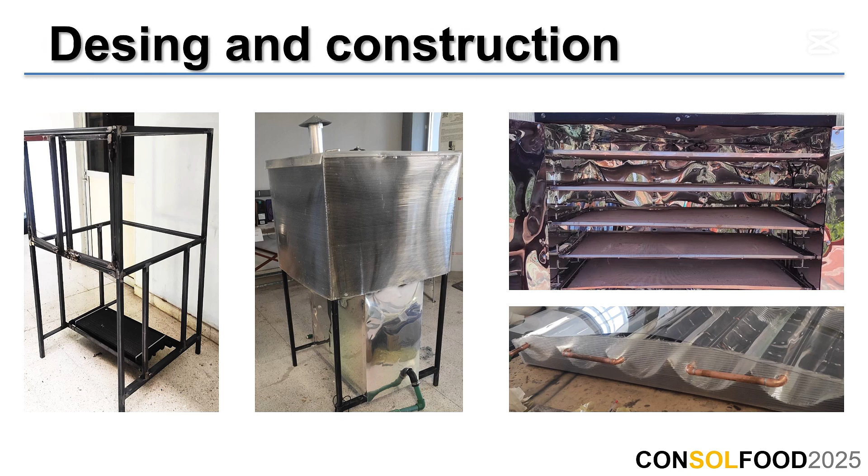The mirrors are oriented west to east and facing south, with a concentration factor of 3 suns. At the focal point of the concentrators, copper pipes were placed, covered with fins made of an absorbent material that helps capture and transfer solar energy to the heat transfer fluid.

Here you can see a real image of the prototype, and in this video a 3D design made with SketchUp.

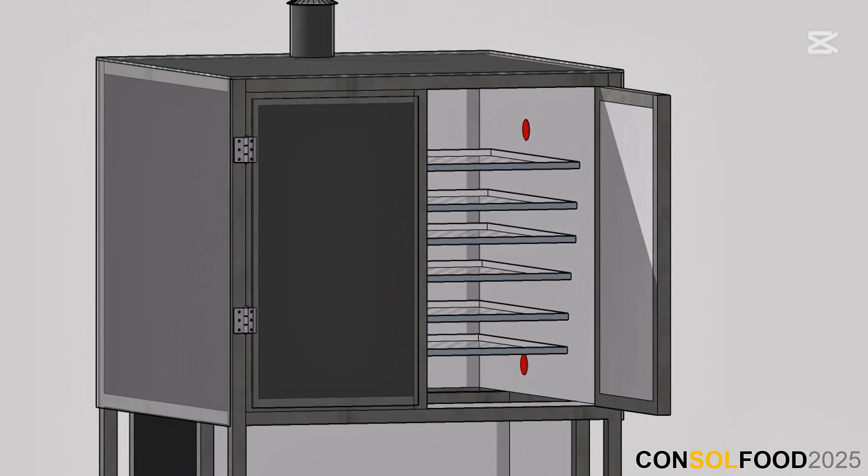The red marks inside the dehydrator indicate the locations of the sensors we use to measure temperature and humidity during the drying process. At the bottom of the system are the heat exchanger, which transfers the thermal energy from the fluid to the air, the chimney, which allows the controlled release of the water vapor, and the piping system.

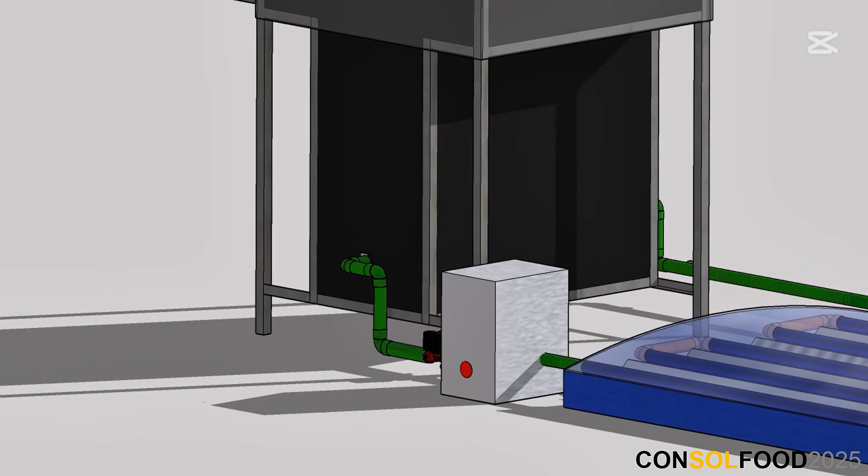The piping connects the pump to the storage tank and then to the solar concentrators. The circuit then loops back to the exchanger, completing the closed-loop flow.

This type of configuration, being a closed system, has an important advantage. It minimizes the loss of volatile compounds in the food, helping to better preserve their properties and resulting in a higher quality final product.

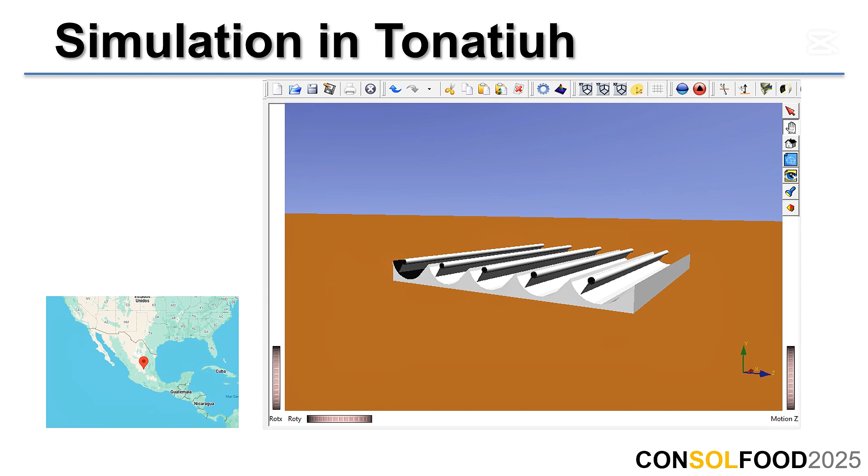This slide shows a simulator made using the ray tracing software Tonatiuh, which helps visualize how many solar rays are absorbed by the system's heat-absorbing fins.

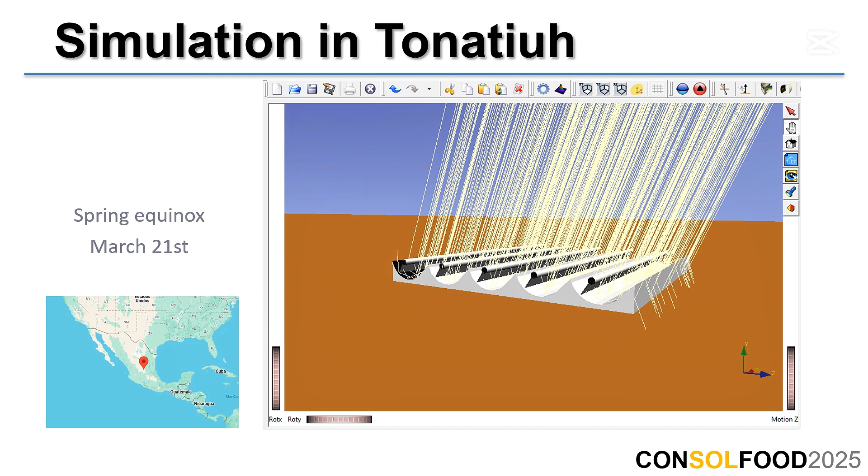The design was specifically created for the geographic location of San Luis Potosí, which is at 23 degrees latitude. The aim was for the flat section of the asymmetric cylindrical concentrator to capture as much solar radiation as possible without needing a tracking system.

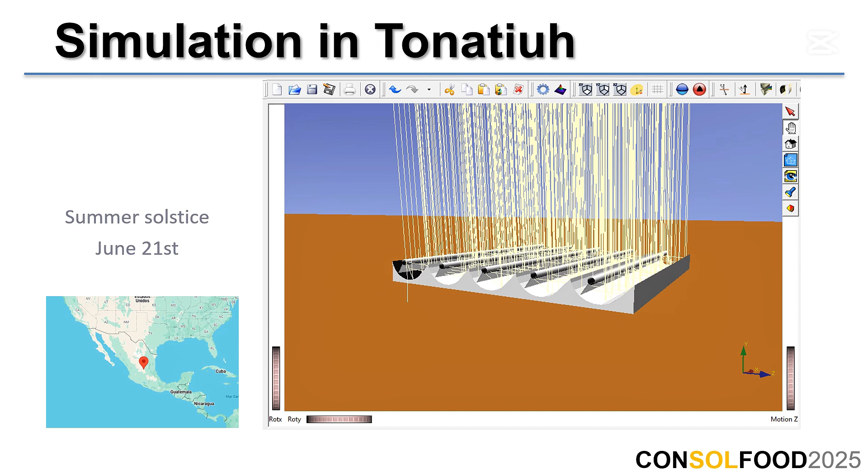The simulation shows that the highest energy capture happens during the summer solstice, when the sun's rays are more direct. In contrast, during the winter solstice, there is a noticeable drop in captured radiation due to the lower sun angle.

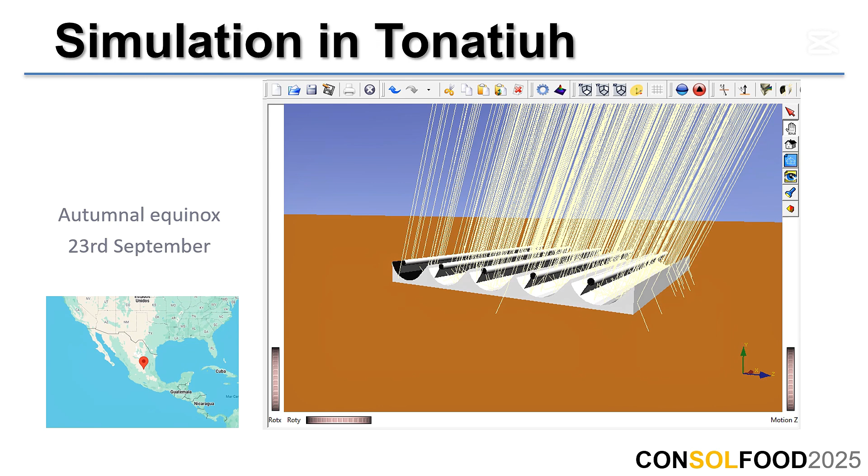However, this reduction is balanced by a key benefit: energy and maintenance savings, since the system doesn't need to adjust its orientation throughout the year. In short, we sacrifice a bit of energy in winter, but we gain simplicity and operational efficiency.

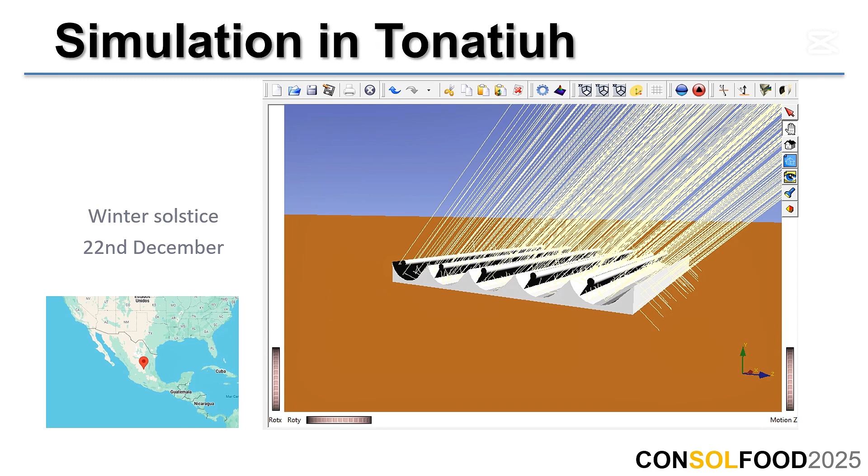To test the system performance, we carry out a dehydration trial using apples. We place 2.1 kilograms of apple slices, each about 5 millimeters thick, on 3 trays spaced 8 centimeters apart. The apples remain inside the dehydrator for 48 hours.

At the end of the process, we obtain a bit more than half a kilogram of dried apples, with a water activity of 0.35, suitable for preservation.

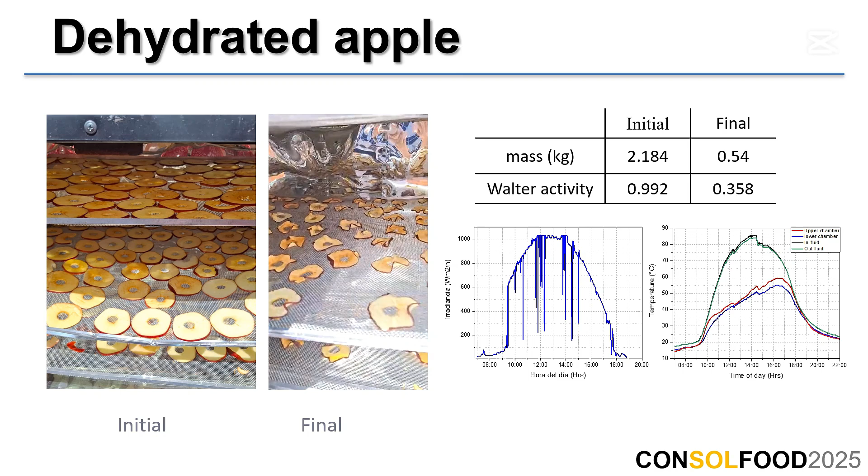During the drying process, the temperature of the heat transfer fluid inside the exchanger reached up to 80 degrees Celsius, while the temperature inside the drying chamber reached 58 degrees Celsius. The relative humidity inside the chamber dropped as low as 20%, which helped extract moisture from the product efficiently.

We also ran drying curve tests with different fruits cut into small pieces to analyze how they behave during dehydration. To do this, the samples were weighed at the beginning and the end of the process. In general, we found that most fruits reach a good level of dehydration after about 26 hours of exposure.

This is equivalent to roughly 12 effective solar hours. These results help us understand the optimal drying time depending on the type and size of the fruit, allowing us to fine-tune the process for a good balance between energy efficiency and product quality.

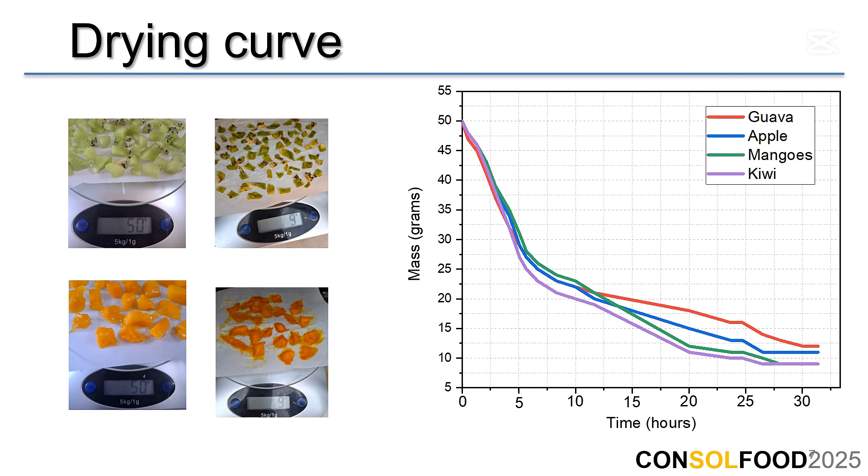To calculate this, we consider the mass flow and specific heat of the water circulating through the heat exchanger driven by the pump, along with the energy provided by the concentrator mirrors. As a result, we obtain an average thermal efficiency of 31%, which is quite favorable, considering that the system does not use a solar tracking mechanism.

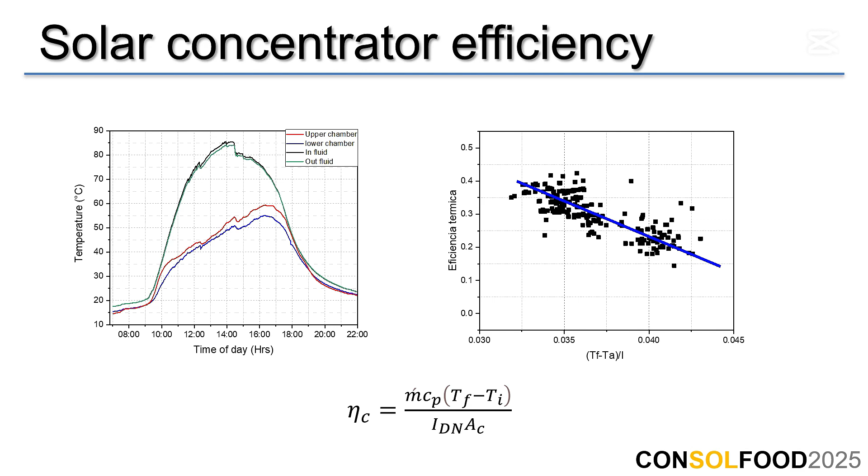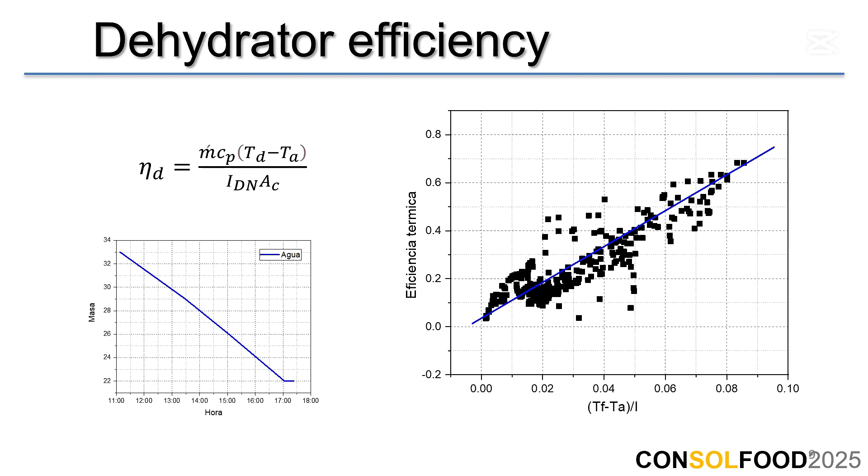As for the efficiency of the dehydrator, we measure the mass flow of the air circulating inside the chamber, driven by the fan, and a specific heat. During testing, we observed a water loss of about 1 gram every 30 minutes, which allowed us to estimate an average dehydration efficiency of 26%.

To conclude, this project presented the design, construction, and evaluation of an indirect solar dehydration system using an asymmetric solar concentrator. The system proved to be functional and efficient, reaching suitable temperatures for fruit drying, with an average thermal efficiency of 31% for the solar concentrator and 26% for the dehydration process.

Tests with apples and other fruits, cut into small pieces, show that it's possible to obtain high-quality dry products with low moisture content and water activity in a reasonable amount of time and without the need for solar tracking. These results suggest that this kind of technology could be a viable and sustainable alternative for food drying, especially in regions with strong solar radiation like San Luis Potosí.